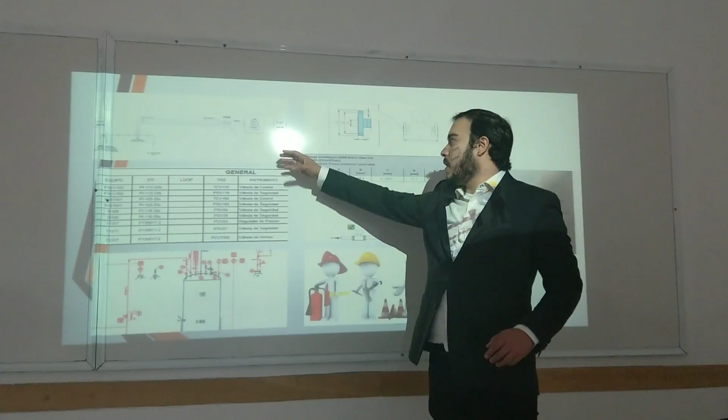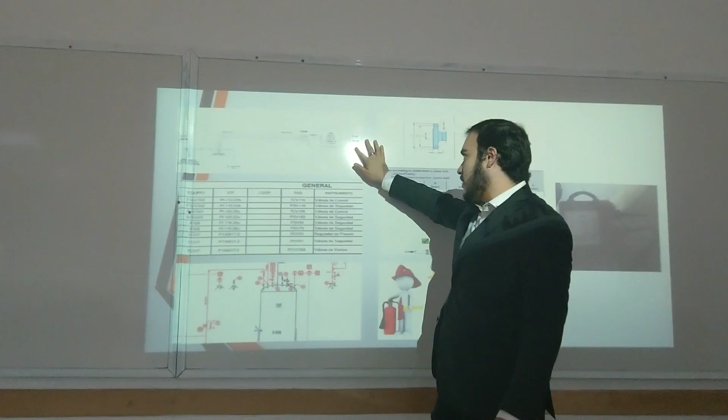Here are some of the images. Here are some examples of how a DTI is built, where we can see clearly, here's a sensor, and here's how the sensor sends the signal, and how a PLC will receive the information. Also, we need to make all the mathematical calculus in order to obtain the measures that we need.

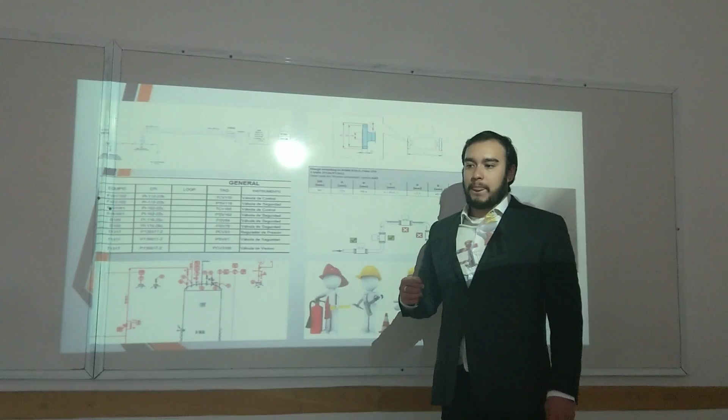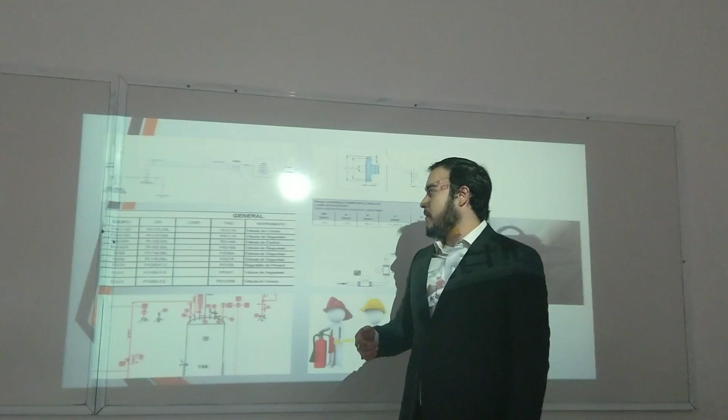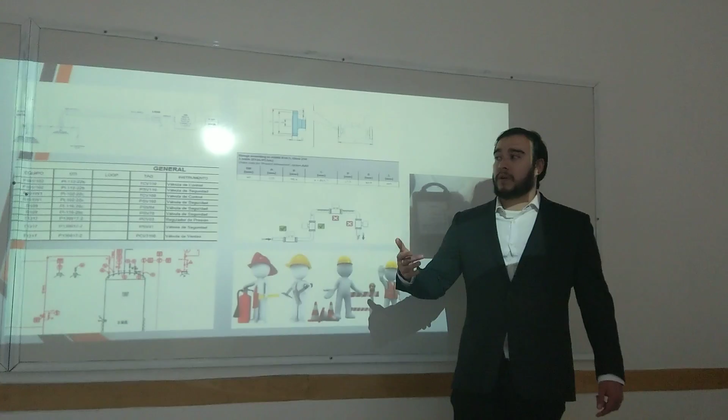Like, for example, here we write the equipment, we write the tag that the automation area gave us, and this is the instrument and the task that it will accomplish. Based on that, we will determine the values that we're going to give to each of the components.

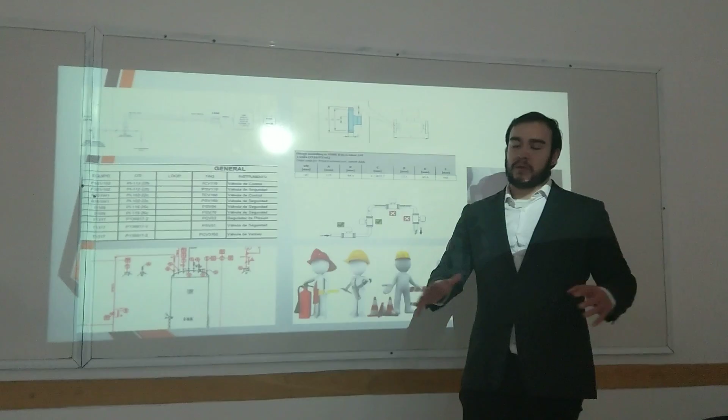Here is a blueprint. I only took one part because they don't let me show the whole blueprint, but this is just a part of the sensors and some of the job that I do. I added them because I need to do the presentation, and they authorized me.

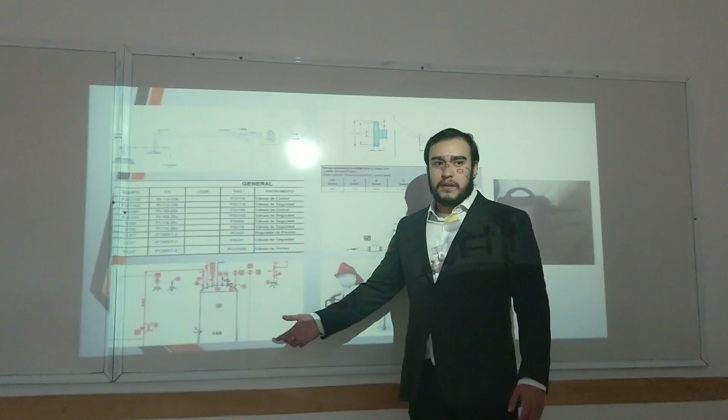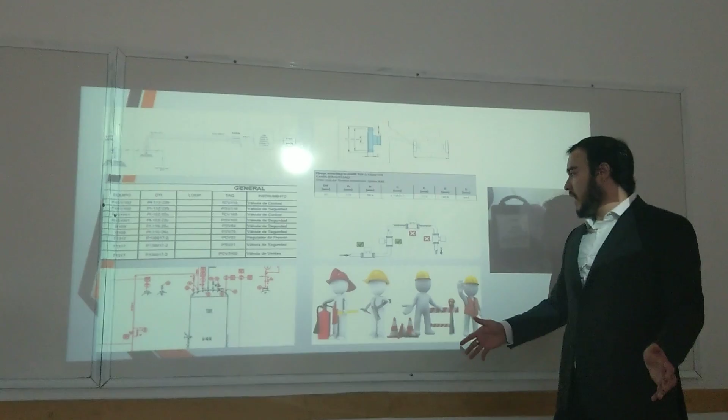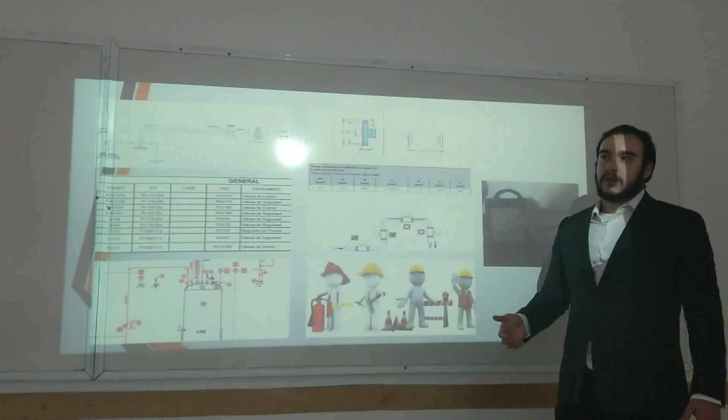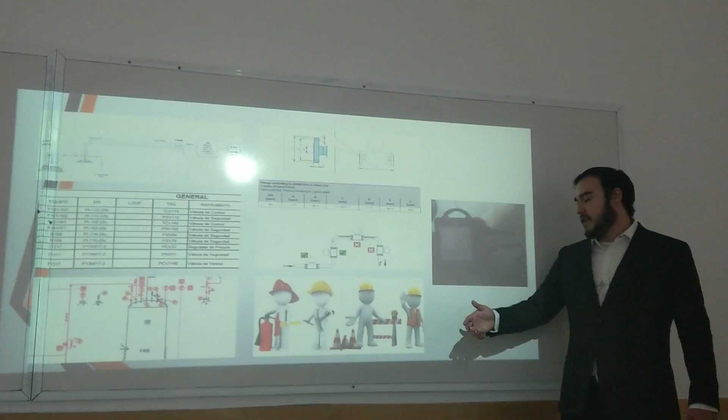Also, here is the explanation of one of the sensors, explaining how I wanted it to be established in real life, explaining how the instrument should go, like going upstairs or in this way, because if we put it here or in this way, the instrument will not function the correct way. Also, using the security areas and checking that the other business areas that enter can accomplish this. These are some of the instruments that I use in order to program each of the instruments.

Well, my learning. The learning that I get here is that I learned how to draw in MicroStation software, a software that is really similar to CATIA. Lead a whole project, because I have already led some of my projects in the university, but not a project in the real field. I learned more about normativity, because each of the areas has a specific normativity, so I need to get involved so I can understand how they work.

I learned how to make loop diagrams. They also told me to take courses, like using extinguishers if required, because I told them that I don't have any industrial security idea, so they made me take some of the courses. Also, they showed me how to use the software.

That is a software that many of the big enterprises use in order to have some of the control. And the importance of teamwork, because working in teams at the university is not similar to working in a complete enterprise that works in different areas in order to complete one goal.